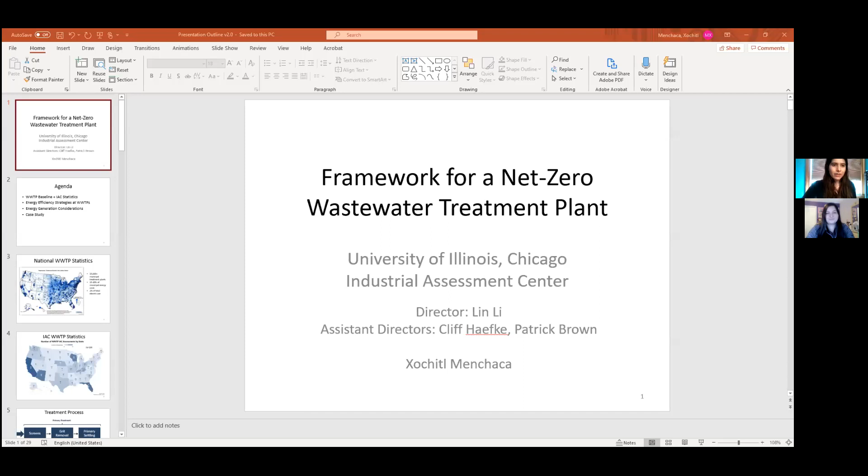All right. Hi, everybody. I'm pretty excited to be speaking to you all today. So as Kelly just mentioned, I'm going to be speaking about a framework for net zero wastewater treatment plant. I am from the University of Illinois at Chicago Industrial Assessment Center with their director, Lin Li, Cliff Haefke, and Patrick Brown. So I just want to start off by giving a big thank you to all three of them, and then also the rest of the IAC team for all their support and the guidance on this so far.

So taking a look at our agenda, I'm going to start off by talking about a little bit of background on wastewater treatment plants. I'm going to talk about some IAC statistics on assessments that we've done. I'm also going to be talking about energy efficiency strategies first at wastewater treatment plants and energy generation considerations. And then finally, a case study that we've done here at UIC.

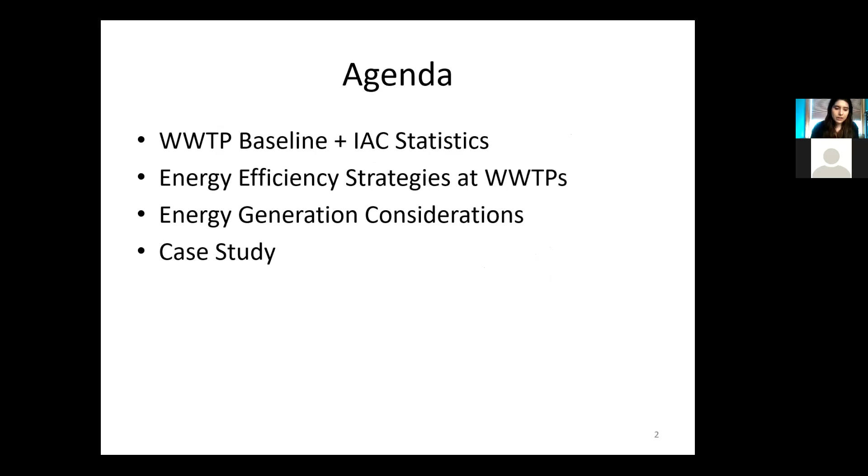But there's 15,000 in the US, and we are looking at energy efficiency in these wastewater treatment plants because they take up about 15 to 30% of municipal energy costs, and that's a huge portion. Collectively, they consume about 2% of electricity in the US. So we definitely are interested in looking at energy efficiency strategies for them.

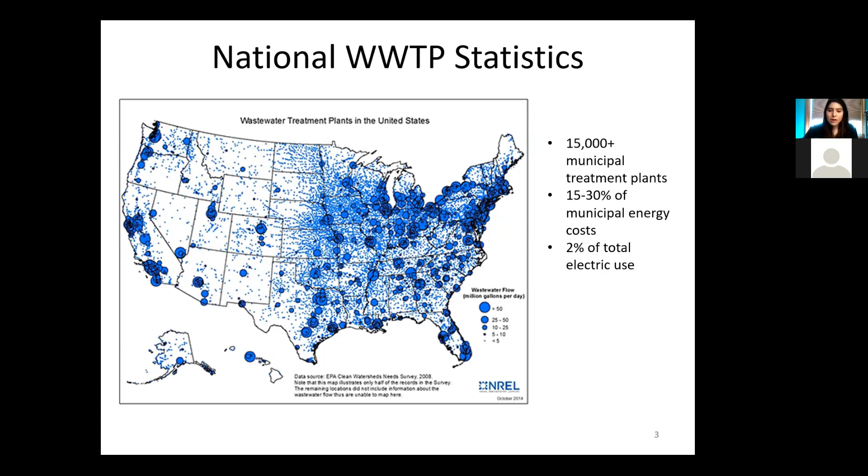And one of the initiatives the Department of Energy has is working with us, the IAC programs, on giving recommendations to wastewater treatment plants. So wastewater treatment plants are actually a fairly new initiative within the IAC. Our very first wastewater treatment plant assessment, according to our database, was in 2006.

But nothing I'm going to note is that this map only has 158 wastewater treatment plants. And as I mentioned before, there's 15,000. So there's a lot of room for growth on looking at what kind of wastewater treatment plants we want to do assessments on.

Just to make sure we're all on the same page on the treatment process, I'm going to walk through a high-level overview of the treatment process at a wastewater treatment plant. It's going to change depending on the specifics of the site and what their needs are, but in general they're going to have primary treatment, secondary treatment, and tertiary treatment.

When the water first enters the site, it's pushed through screens, and a lot of the larger pieces of trash that might have been flushed down the toilet or thrown in along the pipes is filtered out and put into the landfill. Next, there's grit removal, which gets a lot of larger particles like sand and glass. Again, anything removed there is tossed to the landfill.

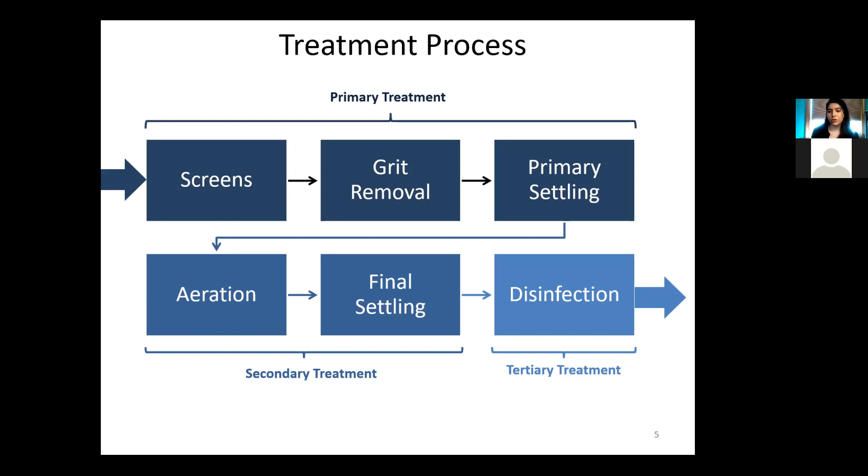After it's been thickened, it's put into an anaerobic digester where it sits for somewhere between 15 to 60 days, depending on the site capacity, the tank capacity, and what the site can handle. When that sludge is done processing, it's dewatered. The water is pretty ammonia-heavy and is stored elsewhere on site, then fed to the head of the plant. The biosolids are then able to be sold or distributed in some other way.

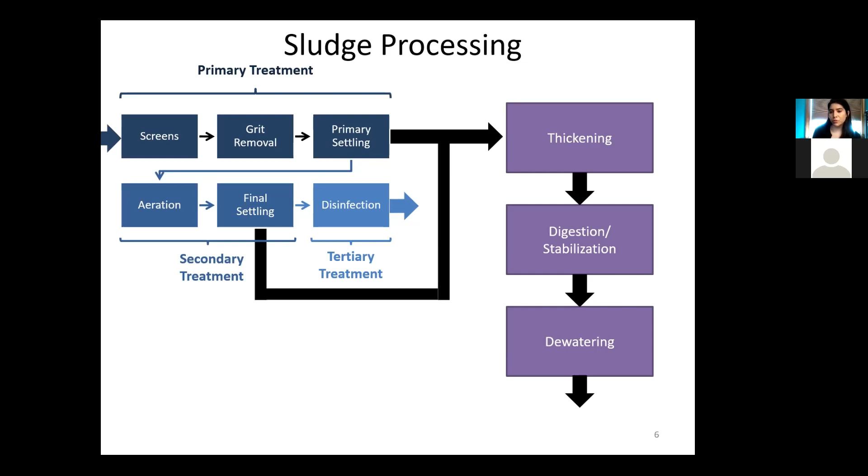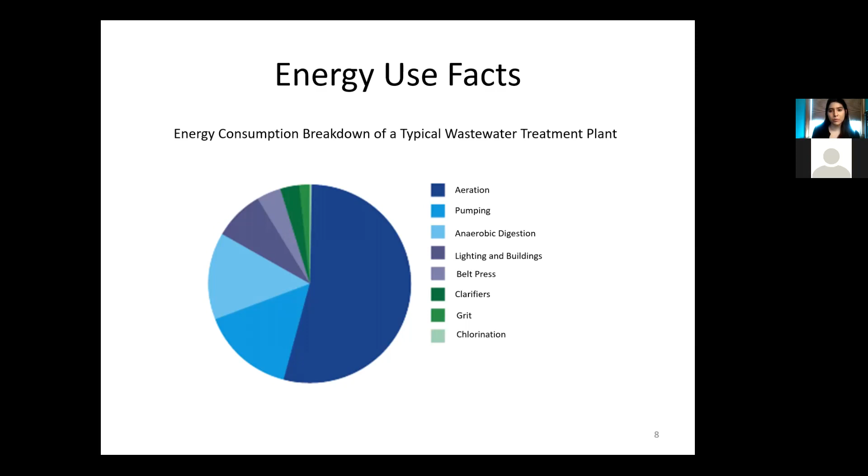Next is anaerobic digestion. Not all sites are going to have anaerobic digesters, but if they do, it's going to be a huge consumer of energy. As we can see, belt press, clarifiers, grit, chlorination also use some energy, but they don't use the massive proportions that aeration, pumping, and anaerobic digestion use.

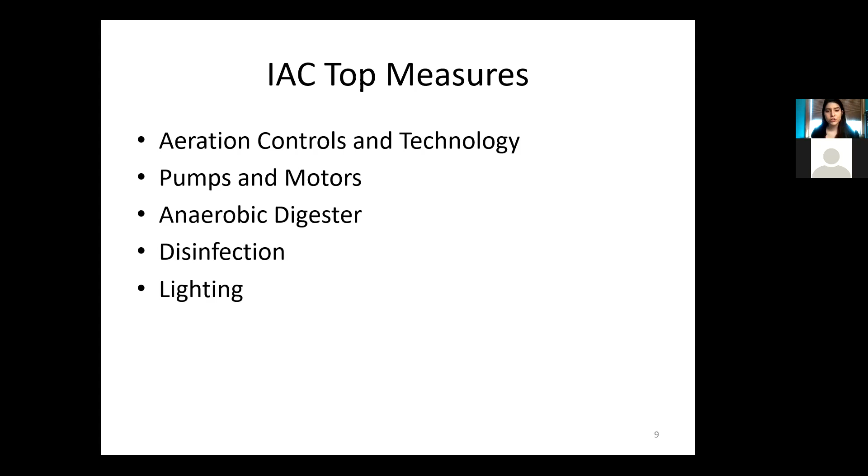So because of this, we're taking a look at some of the top measures that IACs have done, and they are related to the largest energy consumers on the campus. The first one we're going to talk about is aeration controls and technology. There's also pumps and motor recommendations, recommendations for anaerobic digester processing, the final tertiary phase with disinfection, and finally lighting.

There's two main purposes of aeration. The first is mixing the wastewater so it's uniformly distributed between the water and the bacteria and any pollutants in the solution. The second purpose is to expose the water to oxygen, and this keeps the bacteria happy so they can continue processing the water efficiently.

The first type of technology is mechanical aeration, which physically pushes the water towards the surface to expose it to oxygen. This has some limitations, like if you've ever seen a blender making a smoothie, there's always some parts where the blades aren't really reaching. So the mixing is really efficient near the blades but isn't always completely uniform throughout, and there are limitations on the depth of tank this will work in.

There's also coarse bubble and fine bubble aeration. Coarse bubble has much larger bubbles, and because they're so large they move through the solution quickly, doing a great job of mixing. But it doesn't have a very high oxygen transfer efficiency, which the bacteria need to be kept happy and process the organics. Finally, there's fine bubble aeration, which is by far the most energy efficient aeration technology available. It doesn't offer the mixing benefits the other two might, but it has a really high oxygen transfer efficiency, which is great for the bacteria processing in the aeration process.

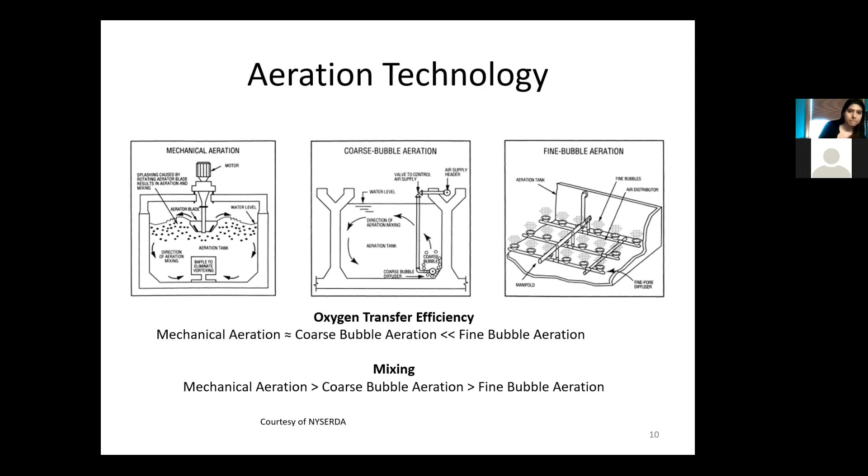Another thing to look at in the secondary treatment stage is aeration controls. There's a lot of really extreme and rapid load fluctuations in a wastewater treatment plant, and this could double in just a few hours' time. Not being able to control for these rapid fluctuations can cause excess energy consumption of 50 to 65%, which is massive, especially when you consider this is the largest energy consumer on the entire campus.

One way to account for this is to calculate the ideal operational DO rate, the dissolved oxygen rate. This really depends on the uptake of oxygen by the bacteria on site. You can monitor in real time the amount of water coming in, the pollutant levels coming in, and you want a way to quickly respond to these fluctuations with the DO rate and aeration levels.

Another thing to look at is pumps and motors. Starting in the design phase of the system, the very first thing to look at is system head reduction, which is really just the height that needs to be pumped. Ideally in a wastewater treatment plant you want to start the process as high as possible so gravity can do most of the work for you. You'll still require some pumps along the way, but having gravity do as much work as possible is really helpful for energy efficiency.

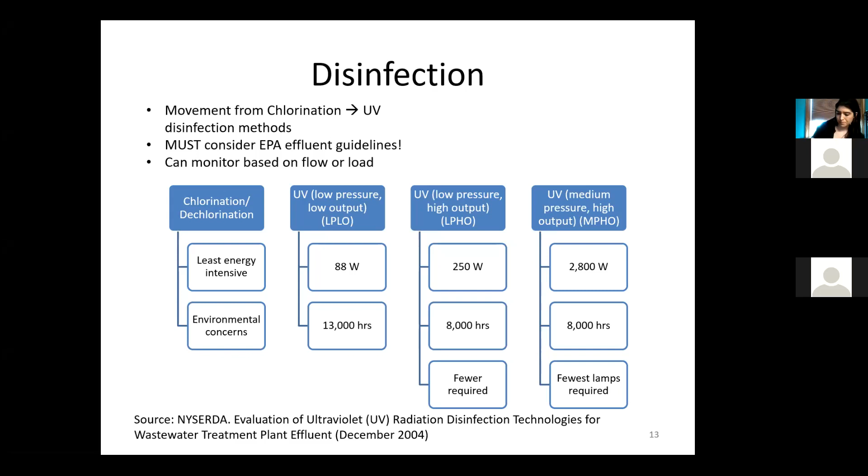And then finally, a recommendation we're probably all very familiar with. This is applicable to pretty much any site you go to: wanting to use the most efficient lights as possible in their buildings and throughout the campus.

They also can operate at more extreme temperatures, which is always a perk when you're living in the Midwest with really hot days and really cold days. LED lamps also can start instantly, so there's no warm up required like you might see on older light bulbs. And they can also be used with lighting controls.

This is another perk on a wastewater treatment plant campus, since there are lots of buildings on campus and not all of them are being used all the time. They don't have a huge staff, so someone might come in to operate or look at a motor for a little while, then leave. You want to make sure these lights aren't just being left on 24/7, so it's really nice that they're compatible with lighting controls.

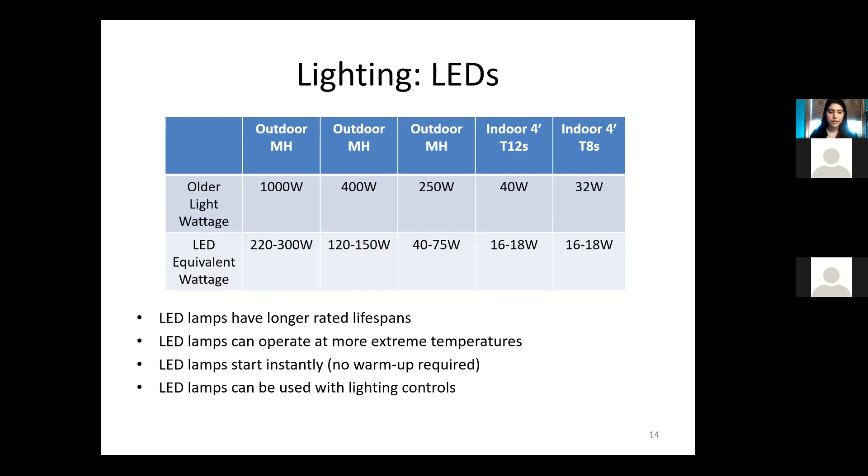This next one is a new technology. It's pretty difficult to recommend since we haven't seen a ton of these available yet in the US, but I wanted to put it on everyone's radar. I talked earlier about how the dewatered sludge from the anaerobic digestion process is really ammonia heavy, and this is really what's driving a lot of the energy usage in the aeration stage.

When it's fed back to the head of the plant, you're really just feeding this extremely heavy ammonia water. So instead of feeding it to the head of the plant at those high ammonia rates, there's a new technology that requires its own process, with its own blowers, its own new bacteria, and its own place on site. You can recover that ammonia and feed it back to the head of the plant at lower ammonia rates, which significantly decreases the energy required in the aeration portion on site.

Now that we have made this plant as efficient as possible, we can start looking at energy generation strategies: combined heat and power, solar PV, wind energy, and a hydro turbine. We have to talk about all 4 of these together because when integrating renewable energy onto the site, we want to have energy security. Just looking at one of them, we won't have that kind of security, so we want backups in case the combined heat and power system is under maintenance, or the solar PV isn't offering all the electricity we need at the time.

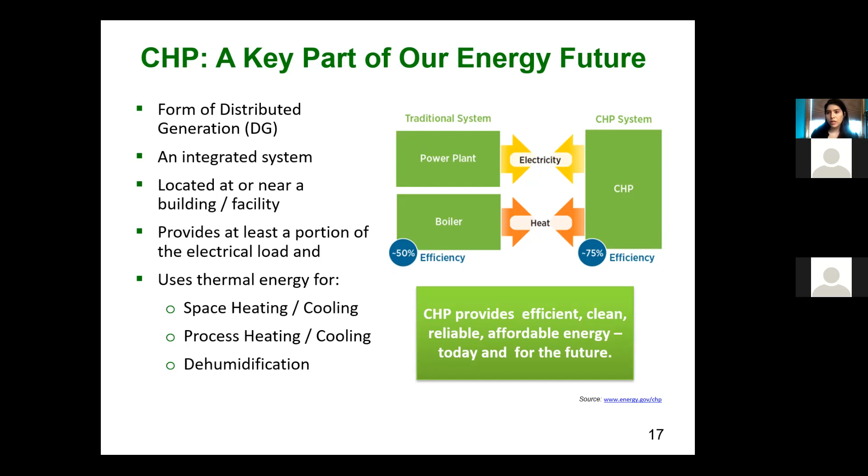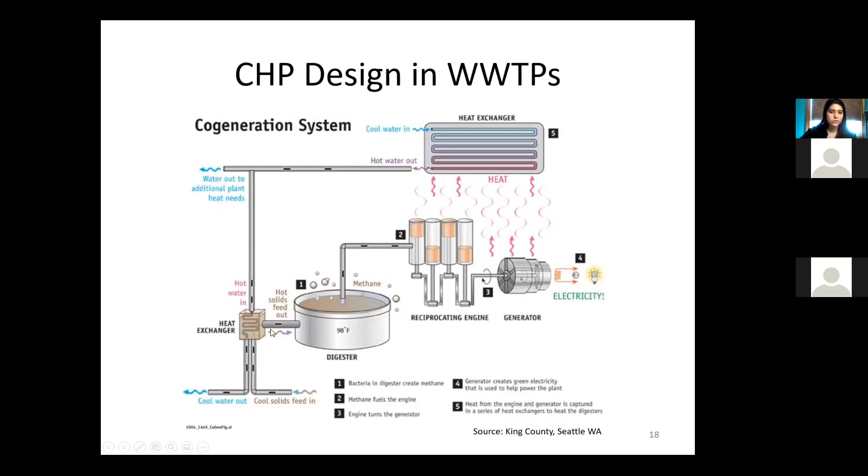This is a schematic of CHP specifically in a wastewater treatment plant. As you can see, this is our digester producing biogas. This methane is fed into the engine that generates electricity on site, and the waste heat is given to a heat exchanger that can serve any plant needs, but also heats the digester back here, which then produces more biogas.

So ideally, we want to maximize biogas production as much as possible so we can get as much electricity as possible to serve our site. The temperature of your digester really depends on your site and the outputs you want.

There are two main types of digestion: mesophilic and thermophilic. Mesophilic is a little cooler, at 35 to 39 degrees Celsius, or 95 to 102 degrees Fahrenheit. This has lower biogas production at a much lower rate, but also much lower energy requirements since it's at a lower temperature. It produces class B biosolids.

Thermophilic is 50 to 65 degrees Celsius, significantly hotter. It produces a lot more biogas at a much faster rate, but requires a lot more energy since it's at a higher temperature. This produces class A biosolids.

These biosolids are able to be sold and distributed for crops, and you can give them to consumers, so potentially this could be a higher revenue source. But for class B biosolids, you need a special permit to use those, so they're not normally sold, meaning it wouldn't be a revenue source for these sites.

But even within one class of digestion, you still have a lot of opportunity for maximizing biogas production. Say your site had the anaerobic digester sitting at 35 degrees Celsius. If you have enough waste heat to raise that temperature by 1 or 2 degrees, you can actually increase biogas production by maybe 15 to 20 percent, as we've seen in some of the assessments we've done.

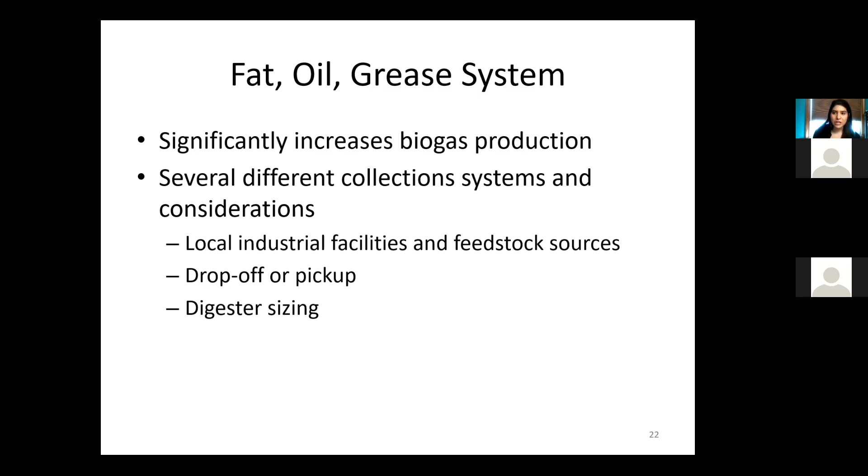Another energy generation strategy is solar PVs. This is unique to wastewater treatment plants because they have pretty nice sites for opportunities here. Most of the buildings are pretty short—they're not going to be high rises—so there are no buildings blocking the sun, and there are often pretty wide open areas.

One of the biggest considerations is financing economics—no one's going to invest in these PV cells if they're not going to pay off in a reasonable time frame. One option is power purchase agreements, where somebody else owns the PV cells but can sell the electricity back to the plant.

Another big one is incentives. We especially want to look at these before they start going away, whether they have them on the city level, local level, state, or federal level. Taking a look at incentives is probably one of the biggest ways of getting a great payback on solar PV cells.

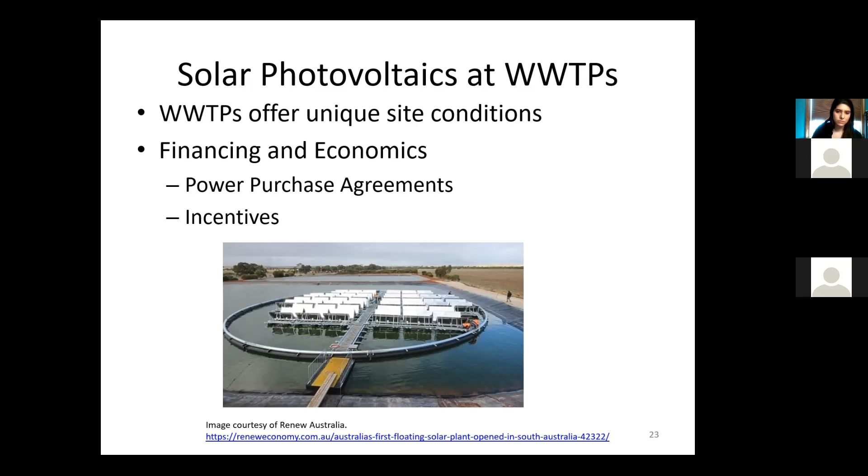Of course, the best way to have great payoff on your PV cells is the amount of production solar PV can produce. Our friends in California, Arizona, and New Mexico are probably pretty familiar with PV since you can get so much electricity out of it each year. We're here in Chicago, so we're not getting an immense amount of electricity each year, but we're still seeing pretty great paybacks on PV cells—a lot of investment, because of the incentives I mentioned before.

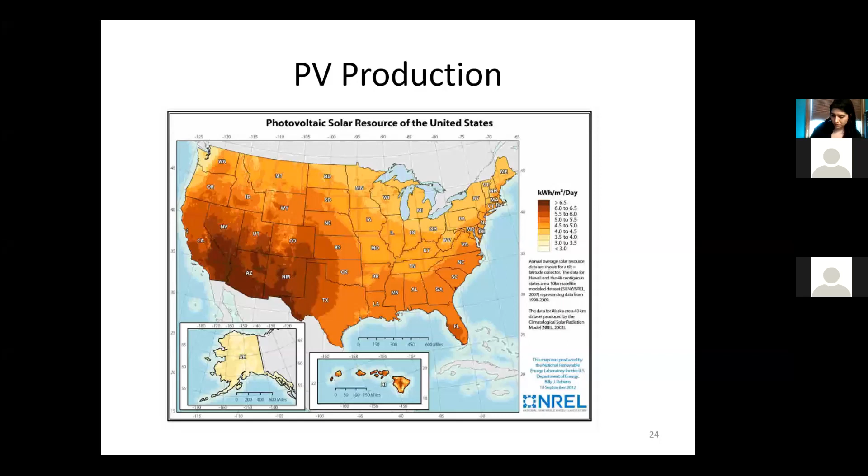Another great energy generation strategy is wind turbines. There are two different types: mechanical and electric. Mechanical wind turbines are basically windmills—they have to be located directly above whatever water is being pumped, and they translate wind energy into pumping energy for the plant.

The other type is maybe one you've seen driving through cornfields—those are electric wind turbines, which translate wind energy into electricity. The nice part about these is they're not required to be directly above whatever water is being pumped; they can be located anywhere on the site getting the most wind energy.

Another thing to note is that electricity production is proportional to the cube of wind speed, so that's definitely important for sizing—you want them operating at maximum efficiency as often as possible. The location and the flow are really going to determine whether it's economical for these turbines to be on site.

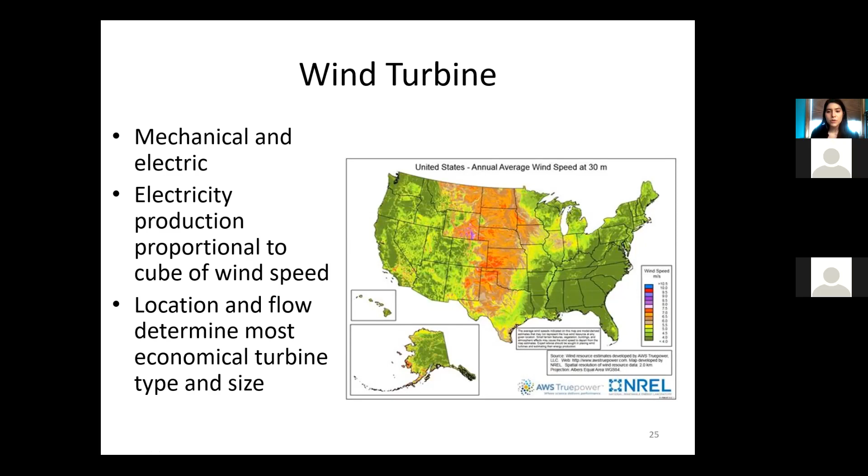Another energy generation strategy is a hydro microturbine, which the next webinar is going to dive into a little more deeply. This is pretty much a very natural way of finding energy on a wastewater treatment plant site because it's derived from water flow, and as long as we're processing water, we have that flow. So it's very secure, reliable, and a constant source of energy on a wastewater treatment plant site.

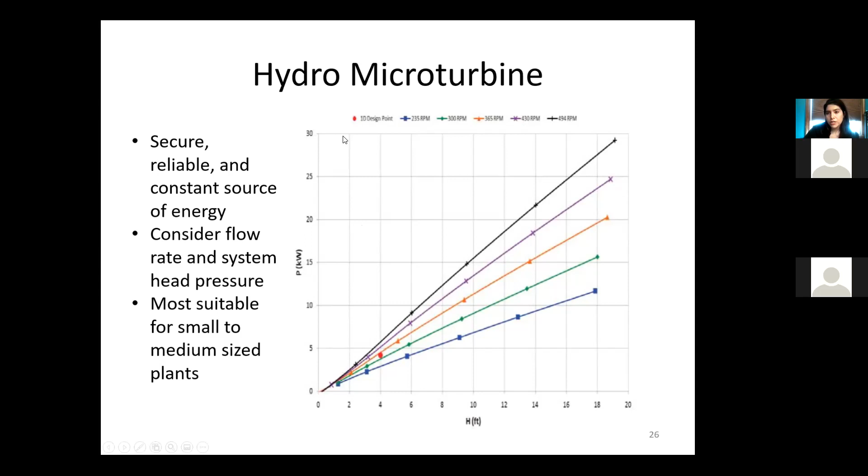So one of the sites that we visited was the Kishwaukee Water Reclamation District. This is in north central Illinois, and they were a big inspiration for this project. We've done a lot of work with them, and I wanted to highlight some of the reasons why they've been so successful. One of the first things is they started by looking at energy efficiency.

They focused on having the most energy efficient equipment as possible. They took a look at their disinfection and chose the UV lamps that were most efficient for them. Another major thing for them was the energy management information system - they invested a lot of time and money in understanding their energy usage and where it goes. That's really the first step to reducing energy consumption: understanding where it's being wasted.

And then on the energy efficiency side, they also engaged with us, the IACs. So even though they had really great management and really great expertise on site, it's also nice to get that outside expertise and outside insight - maybe someone might see something you didn't see the first time. And then after energy efficiency, they also had a lot of really cool energy generation strategies.

They had one combined heat and power system, and were planning on integrating a second one down the line. They have plans for solar PV cells, and also plans for a hydro turbine. So again, they focus on having this redundancy, this energy security, and this resiliency with multiple energy generation strategies.

So again, the pillars I want to focus on for their success: first their energy management, understanding where it's going and then reducing that as much as possible. Another one is investment - understanding the cost of these technologies and the payback, and being willing to make those investments.

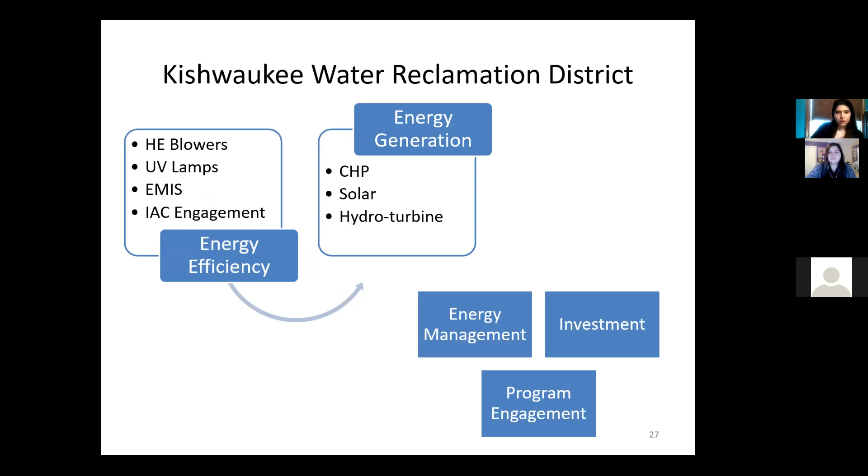Yeah, that again really depends on the site. We have recommended more efficient blowers to a site, and it really depends how much electricity is going to save based on the site, so I can't give overall concrete numbers on that. But there are recommendations on high efficiency blowers, having VFDs on your blowers, and just making sure that you are operating at the optimal DO rate for your site.

Okay, I missed one earlier in the chat. We have observed long, simple payback periods when we suggest the use of digesters. What aspects of a digester should be focused on when recommending one?

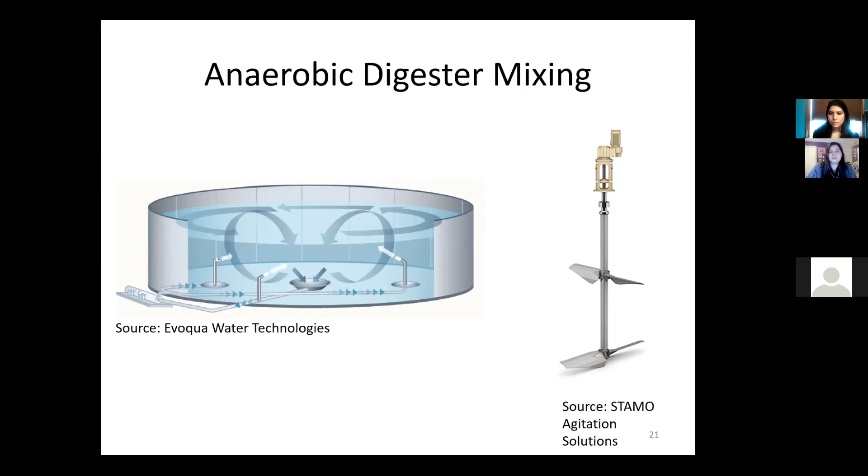All right, thanks. Another one: what changes to the anaerobic system are needed to change from mesophilic to thermophilic bugs?

So really the main change is on the temperature. They have two completely different types of bacteria, and it is going to take some time if you want to transition from one to the other to let that bacteria slowly grow. Another thing I didn't mention previously is that if you have enough thermal energy to keep your digester at 45 degrees, it's not going to be beneficial for you, just because the mesophilic bacteria is not going to be thriving and the thermophilic bacteria is not going to be thriving either, so it's not going to be producing the biogas that you want. You have to commit to one or the other, and really it's going to be related to how long it takes that bacteria to grow.

Another one from the chat: is there a reliable source to estimate the cost for a digester? Not that I know of. I think that it's pretty difficult to make exact recommendations on that because it is so dependent on the site.

Can I go with a follow-up on the mesophilic and thermophilic bugs? On that one, if you switch around, you're going to get higher energy production, which I'll assume means a higher percentage of methane coming off the digester. Do you have to make changes to the CHP system to accept a higher percentage of methane in the system?

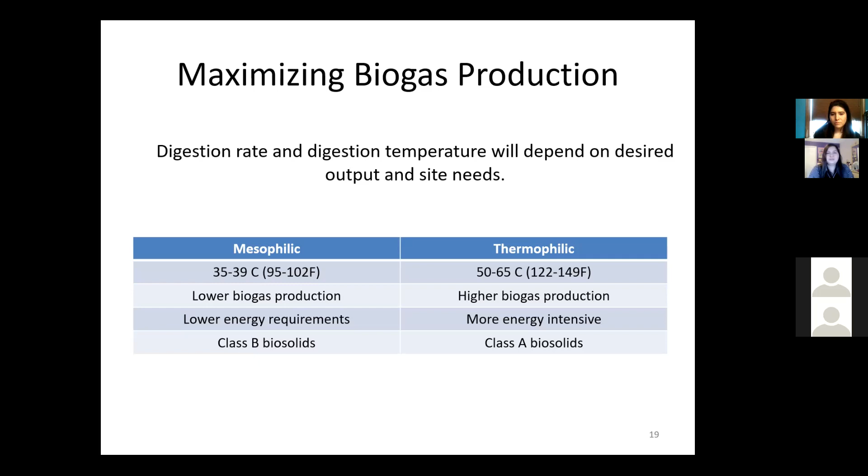All right. Were there any issues with the data you used to compile the IAC statistics you showed at the beginning, like the EUI graph?

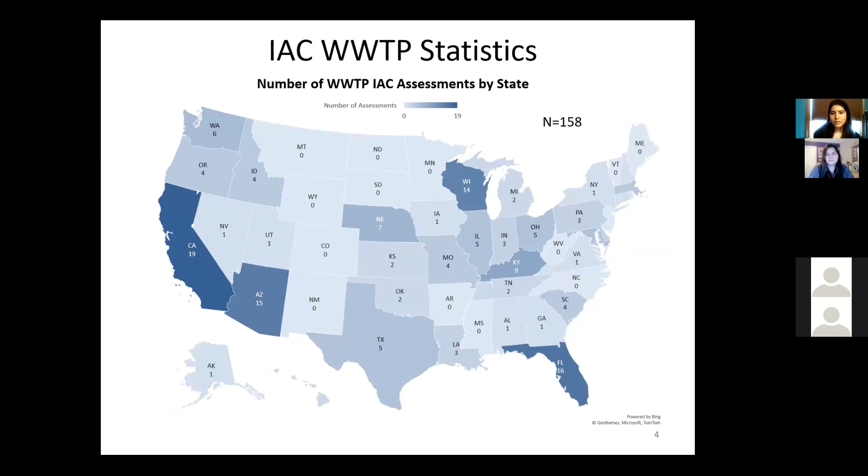Yeah, so actually, of all the wastewater treatment plants we've done, according to the database, there was like 218 of them, and I narrowed this down to 158. Number one, there were a lot of different inputs on the units of water being processed, so I stuck to only the ones that had thousands of gallons, but there were some that just said units. There were some that were outside the realm of reality - like one of them said the wastewater treatment plant processed more water than the largest wastewater treatment plant in the world. So you have to eliminate some of those points.

And then some of the ones sitting on either end of the spectrum - there was one that had 1,000 gallons processed per year or something, and the energy usage for that one was just completely outlying of what was reasonable. So it did take a lot of processing the information. There were some issues with it, but I understand how difficult it is to get reliable information from plants, especially when we're just asking for estimates. It is hard to get exact values from them.

All right, a follow-up to that question about the problems you had with the data in the IAC reports: you could probably get information from the EPA regions about the capacity of the different plants.

Yeah, so there is definitely a lot of information available from the EPA, but a lot of the tracking for wastewater treatment plants is done on a state level based on their electric usage and their flows. So it's just a big process to have to go through each state's EPA and pull data from that. There is some data available on the federal EPA level though.

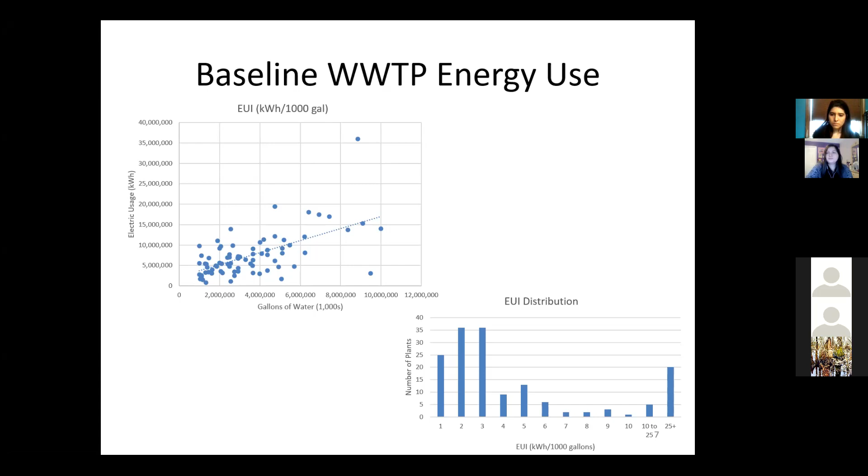Yeah, that is. That is one of the major consumers of energy - the aeration that's driven by the DO, right, as that's one of the ways that they are controlling it.